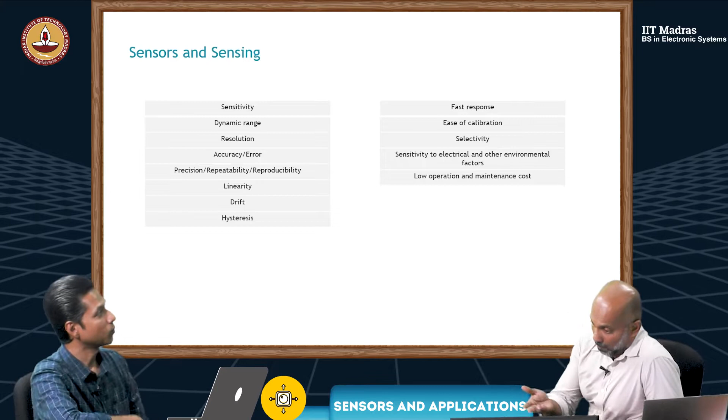Now, we also have this other kind of characteristics of sensors. Normally, if you were to choose a sensor, what's the first few things you would look at? You talked about the temperature sensor before. You said you chose a cheap sensor and then you had some problems, remember? That's true. So let's say I'm telling you, get a sensor. What will you look at?

Maybe I will look at the accuracy. Accuracy, yes, probably the most. I will maybe check whether it can sense the range of interest. Suppose it's temperature, maybe I want from room temperature to 1300 degrees Celsius. But if I buy something that can measure only 100 degrees Celsius, then you will send me out. No use. What else? I may want it to work for a long lifespan.

I always want good sensitivity, of course, since you gave some hint about sensitivity. Right. So here, if you look at these two different tables, you talked about sensitivity, range, resolution, and accuracy, right? Resolution, we did not discuss. Resolution also, we will see later.

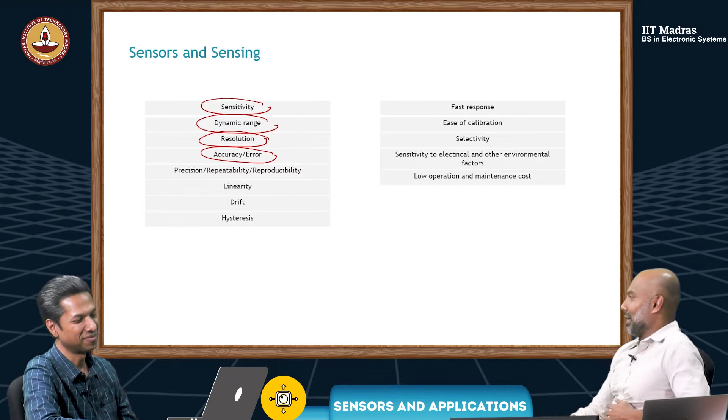But there are also other things like precision, repeatability, reproducibility, linearity, drift, hysteresis. I think when you hear these words, you probably can get some idea what it is. But it's good to know formally, with regards to sensor output, what these terms exactly mean.

Now, you also have things like fast response, ease of calibration, selectivity. Is it sensitive to some outside effect? Selectivity, I think, is very important. So what about fast response? It depends on the application. If you have some feedback, would fast response be preferred? How quickly your sensor reacts. If I want the system to settle within some time frame, I may need a sensor with much better response. So your frequency should be high. Correct.

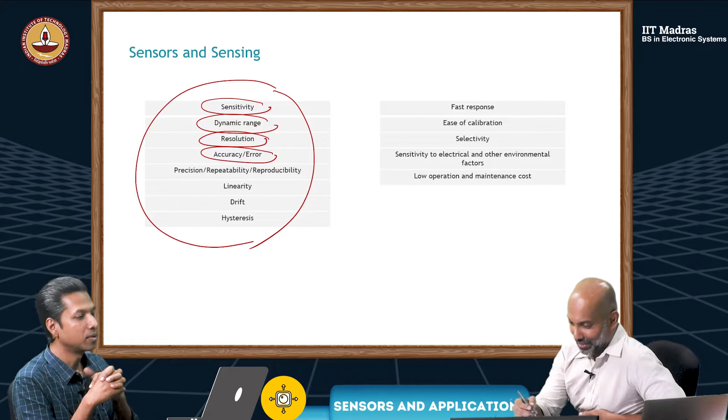Ease of calibration, we'll cover this separately. These ones are as important as the ones here. Initially, if you ask anyone, they'll probably say the same thing as you: accuracy, sensitivity, range. That's why I have it in two different tables, but both tables are very important.

So fast response is if you have some kind of feedback loop. If you want the sensor output at very high frequency because you want to change something, an actuator or something, then the sensor has to respond very fast to the measurement. Right. Ease of calibration.

I don't want to calibrate always. I already purchased it to do this job. But sensors over time might change due to many different factors: temperature, humidity, a lot of different things. So ease of calibration is important. Will it take minutes? Hours? Days? Months? Whether I have to dismantle everything and then do it. It depends on that.

Now imagine you're the manager on a workflow. You have 10 sensors. If you have to spend, let's say, 2 weeks to calibrate the sensors, you probably have to halt your workflow, right? Correct. So again, how easy is it to calibrate?

Now, selectivity. What does that mean, Bobby? Selectivity means I'm going to select something. I want that only.

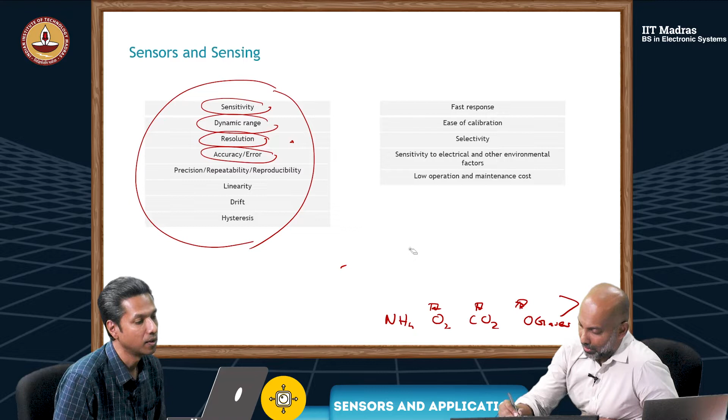What else do we have here - sensitivity to electrical and other environmental factors. What is this electromagnetic interference I heard about? I don't know, you're the electromagnetic guy, that's why I'm asking. And shielding and all these things - I don't know why, but I can give an example.

I was doing some measurement using an oscilloscope. I connected the probe and was just hand touching it - my finger touched the probe of the oscilloscope. I saw that I'm generating some waveform, because the display started showing a nice waveform just from touching it. So there's some interference there, from me touching it. Then I tried to measure its frequency - any guess? It was giving 50 hertz.

So that is what you meant by interference. Yes, because I am coupled to the wiring of 230 volt 50 hertz wiring and my body - there is some capacitance. I'm sitting on a wooden chair, not electrically grounded, so there is some current flowing through. This is a very, very small current, but I am at some potential, and the oscilloscope is very good, so it is able to show that waveform.

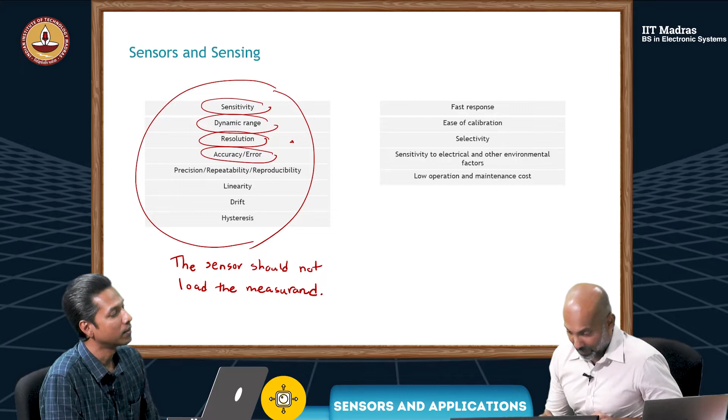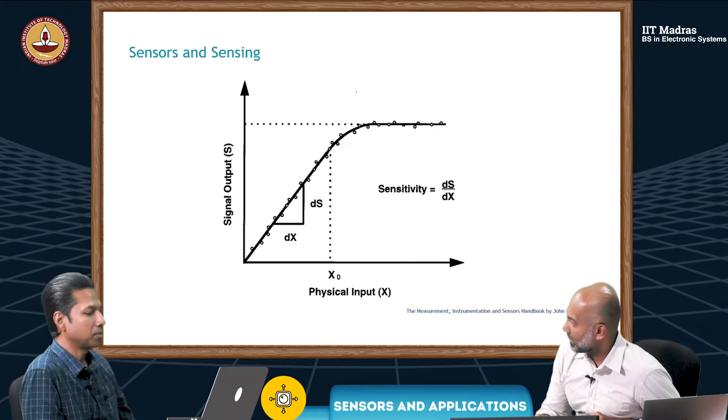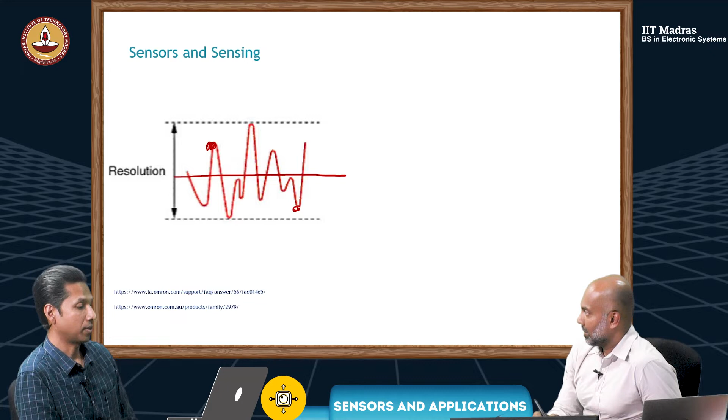Input is fixed. We are only trying to measure one thing. You have made the sensor electronics, and there is a final output coming. That is changing. There is change.

That's a problem, isn't it? Because then, let's say for example, you measure the next step up, right? Then you might have that next step within this range, which I may not know. We don't know, but it could, because in reality it could move up to a different level. Correct, but it's not.

That's the difference between one point and the other. Let's say you're measuring some length, doesn't matter what it is. Your first point is L1, next point is L2. You have a sensor, now you measure this length here. So the sensor is kept at L1, and then at the L2 location you are measuring.

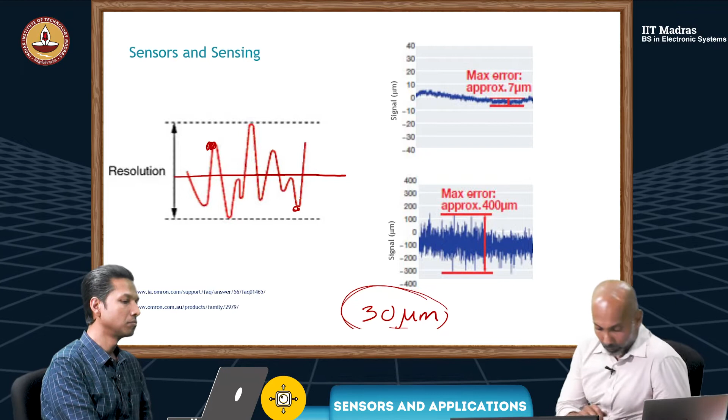Got it. What is this? Oh, many straight lines I can see. There are some dotted lines also. I know you like straight lines and sensitivity, you can easily measure, right? Yeah, correct.

But you mentioned something when I showed you the different characteristics of a sensor we should be considering. You said something about accuracy. I care about accuracy. It has to be close to the true value.

So if you look at this graph, you have a straight line here in the middle, not the dotted one. Let's say that is your ideal graph. If you're measuring something, all your points should fall on this ideal graph. This is the input versus output characteristic.

But in reality, let's say you have a sensor, and you notice that your output is not falling exactly along this line, but on either side of your ideal output. So some amount of variation is there. In this graph, the dotted lines show the range of this variation, where these values fall between. This variation can come from the sensing element or the electronics, or from some outside interference or environment. All these parameters contribute, and you don't have much control over them, so it may change randomly within that range, somehow out of your control. Because of that, it doesn't fall exactly on that ideal line we expect.

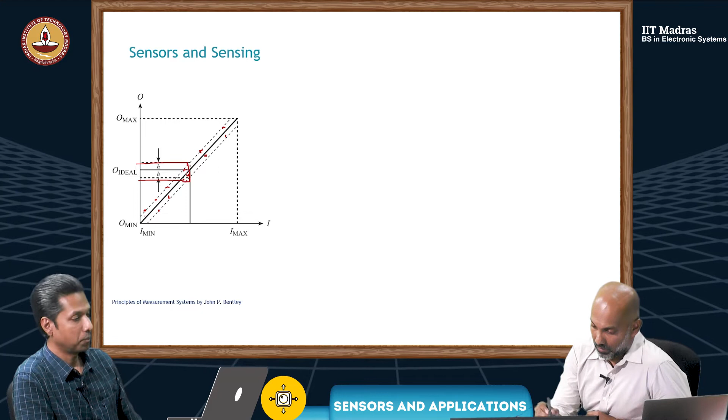So here also, suppose like the previous plot, if I am measuring at x naught, with respect to time I may not get a constant output, it may vary up and down. But generally, if you do enough tests to characterize this sensing element, you might see that it falls between a certain range, which is what's indicated by those dotted lines. So the ideal output and the points might fall between two lines or range, and in this case you have minus h and plus h. This is how much it changes.

Now, if you talk about the randomness of this, if you draw a probability distribution graph, you have minus h and h, so the width of this is 2h, correct. So the ideal graph is here, but it could vary plus or minus h.

And then if you talk about the probability, this will be 1 over 2h, because everything should fall between these two dotted lines. So 1 over 2h, 2h is 1, which is probability of 1. So there's a 100% chance it will fall between these two lines.

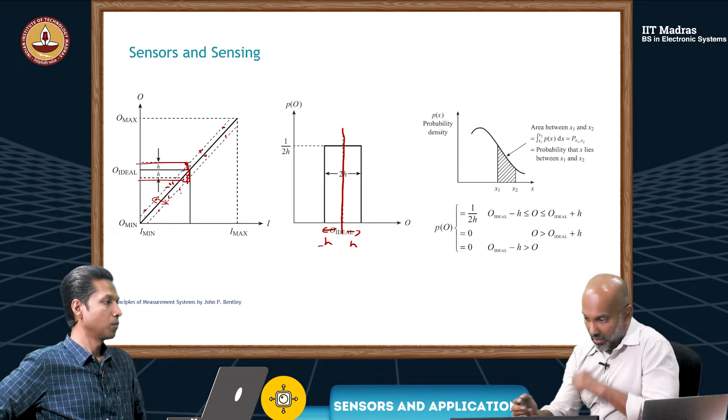This is another way of showing it. You have your ideal O, ideal minus h or ideal plus h, and you have 1 over 2h. What I'm trying to say here is if you have a point, you want to look at the probability of that point falling between two lines. If you have point x, it will fall between x1 and x2. In this case, it will fall between minus h and h.

So that's accuracy. So to my understanding, the sensor is mostly ideal on all other aspects. Yes, let's assume that's ideal on all other aspects. And then you are looking at the output, but there is some randomness in the output. Which is why we're talking about probability. Right, yes, there is some.

So this is kind of the random error. This is probably contributing to the resolution that you mentioned also. Yes, because there also it was random output that is coming within a range. Correct, so these are connected in some fashion. Or this randomness limits your resolution.

Yes. For example, what I'm trying to say is you might do an experiment in one room, and you might see some random noise, let's say. You take it to another room, it might disappear or it might be higher. Ideally, it should not. But then maybe there's something like temperature or moisture, some random variation in the room that contributes to what we see here.

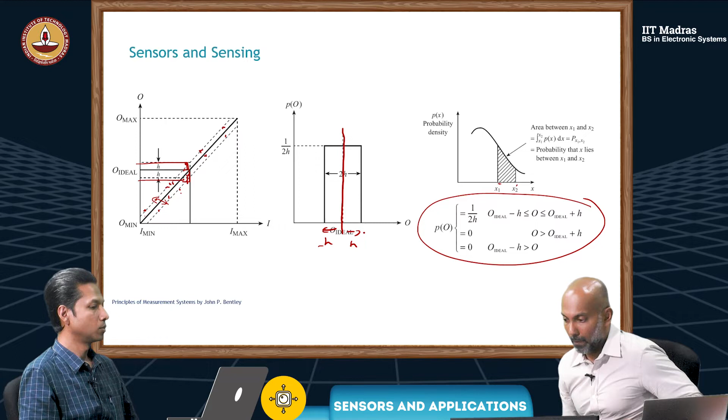Do you play darts? I've done that some time back here. Are you good at it? Can manage. I mean, this looks like a dartboard, right?

Yeah, so Bobby, I think one of the things that people confuse a lot is the difference between accuracy and precision. Because people say, it's a very precise instrument. What does that mean? How is that related to accuracy? So we talked about accuracy before, right? Do you think, looking at this picture, whoever was throwing darts, this could be a sensor output and you put in different contours, for example. Correct. But if someone's doing that, do you think it was very accurate?

Somewhat, not very accurate, but somewhat. I should also say you're aiming to be here. If you're aiming to be here, maybe somewhat, but nearby, I would say. Not that accurate, right? So the true value is at the center. It's away from the true value, right, and you can see there have been several attempts, and unsuccessful attempts. So they're kind of all over the place. So the error is from that center point to each point.

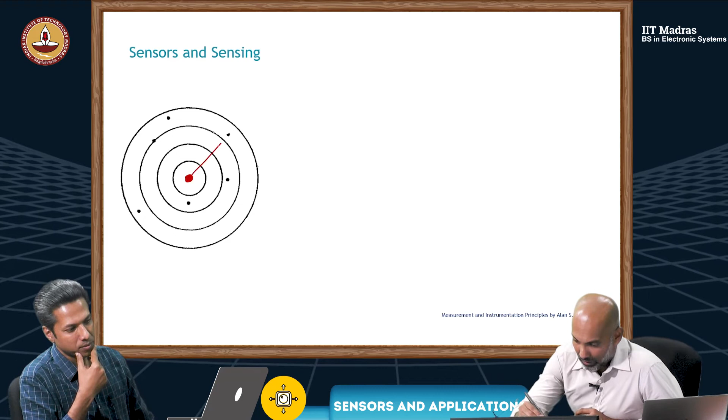What is it here there? Is it accurate now? It's also similar. Its center is somewhere, but this guy is able to hit it repeatedly at some point. Clear, so now he's somewhat improving. Now he's hitting at the same point. But not much use. Not use, right? Because we want it to be there.

So what if I tell you he's not accurate, but he's precise? I would say he is repeat... I mean, his repeatability is high. A person has high repeatability. So when you talk about precision, or we talk about repeatability, or we talk about the distribution of, let's say, some sensor values, for example.

If you take 10 sensor values for the same input, and if they're all over the place like this, we can safely say it's not repeatable, or it's not very precise. Yeah. Right? It's not precise. It's not accurate also, in this case, yes. The first figure.

Second figure, right? Somehow now the values are the same, but it's still not accurate. Correct. So it's not accurate, but precise. This is precise. That's the second figure. Second figure is precise because the distribution is much smaller compared to the first figure.

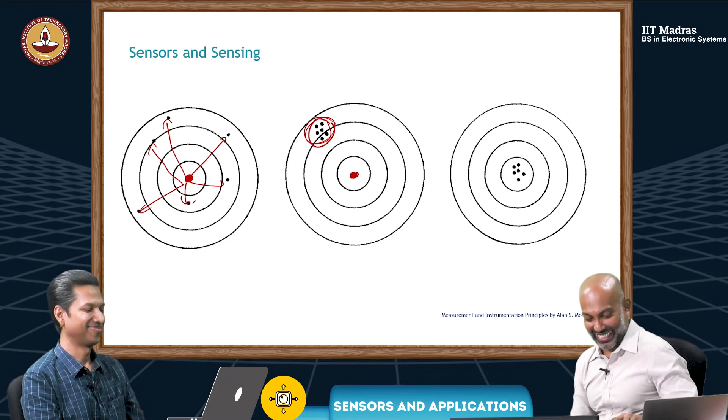Okay, Bobby. Let me test you now. You know what resolution is? Yeah. You know what accuracy is? Okay. Now let's start with this graph here. Here you have your perfect ideal sensor. And to the left here, you can see in red, and also a staircase. What is that red one? The red one is just a line joining this staircase. But let's say your sensor output is the staircase.

In terms of accuracy and resolution, how can you explain this first graph? I need to compare it to the continuous line. You compare to the straight line. Yeah, compared to the straight line, of course, the resolution is reduced. Because as I'm changing the input, for some time there is no output, then there is a change in the output. So some smaller changes it's unable to detect, or I am unable to resolve smaller quantities.

Right. So I have a staircase output, but I also see some deviation; the slope itself is changed. So what can you say? So there is an error in the gain, or error in the slope. Yes. So you could also say it's not very accurate, right? Low accuracy. Or that error in the slope will affect the accuracy. Okay. What about this one?

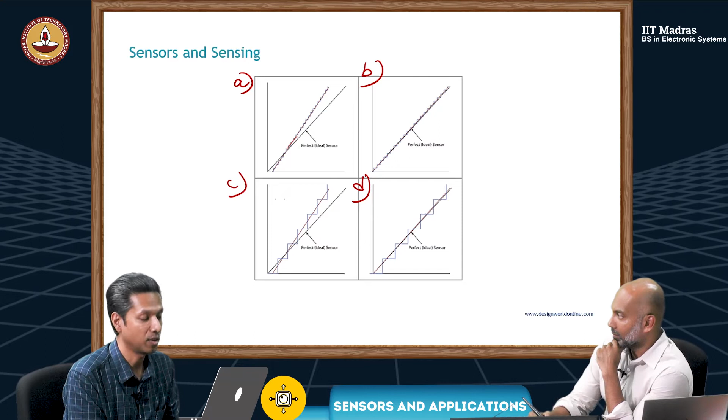Let's make this A and B. Between A and B, maybe I will prefer B because at least there is no gain error, the slope is the same. Okay, so here, if you compare these two, this one has better accuracy, but limited resolution.

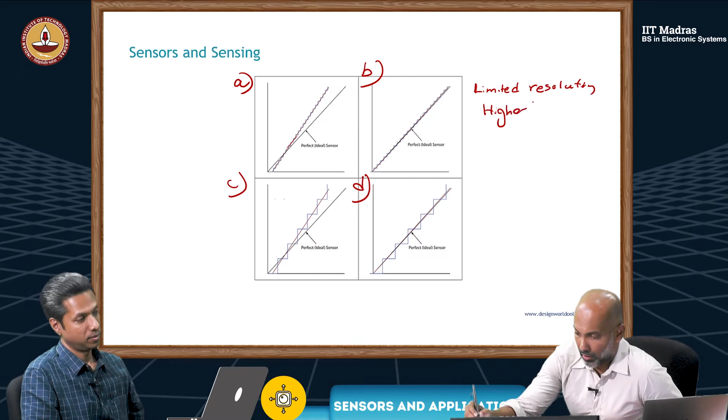But higher accuracy compared to A. And also high accuracy. I mean, if you compare to the perfect ideal sensor, it's close to that. Yeah, high accuracy.

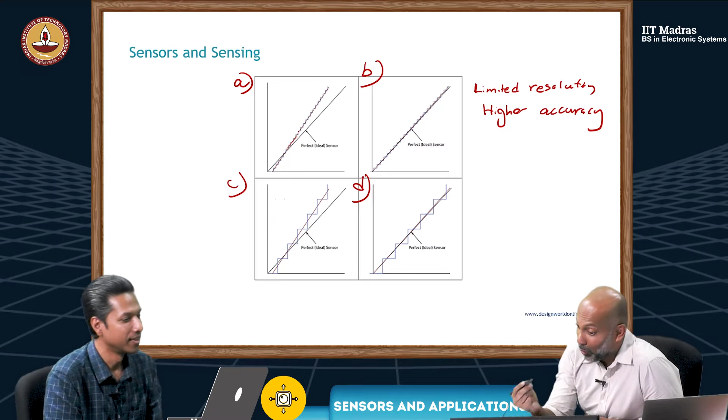Now, look at C. This is a nice staircase, right? I need to climb. It's so big. Resolution is so bad. So here, if you compare this one to this one, we can clearly see this resolution is much worse. Correct, right? But it doesn't stop there.

It has additionally the gain error also. So bad resolution and bad error. Right? It's not accurate. What about this one? D is poor resolution. Still poor resolution, right? Because of these large steps. Correct. But at least it's accurate. Yeah, it can also resolve smaller quantities.

So if you were given a choice, you would... I'll go with D. You go with D. Right? Okay. I passed? You passed. I thought you even got angry when I showed you C.

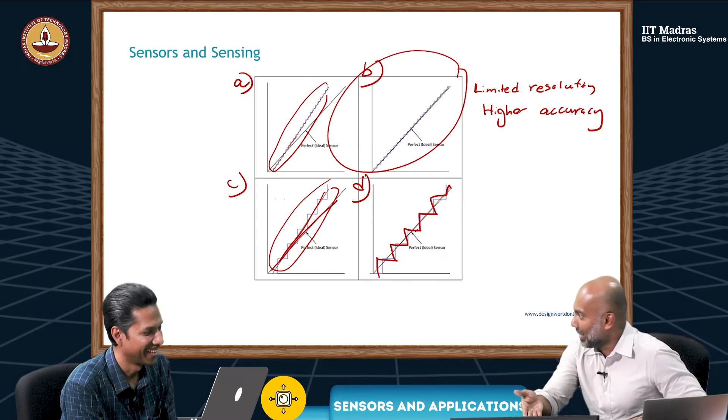Bobby, now I know you like straight lines. Yeah, of course. And we've been talking about straight lines all this time. And I saw when the sensor saturated, you said, forget about that part. Then we cut it and we had a range. And you found the sensitivity. You were happy. But now here's a problem. Here you have an ideal case. Ideal sensor is a straight line, which is what you like.

But you go to the lab and you're now testing a signal output. It's something like this. I don't know how to explain. Is it slipping in between or what? It's not straight. If you had this ideal, you'll have something like this, KI plus A, a straight line. K is your gradient, A is your intercept, right? You have a nice output, but in reality, you are getting something like this.

Which means what? There is some nonlinearity. It deviated from the straight line. And there's a point where there is also a maximum deviation. So sometimes sensors do this. They deviate from that line. And here you can calculate the maximum deviation, and then that is related to the maximum nonlinearity as percentage of the full scale.

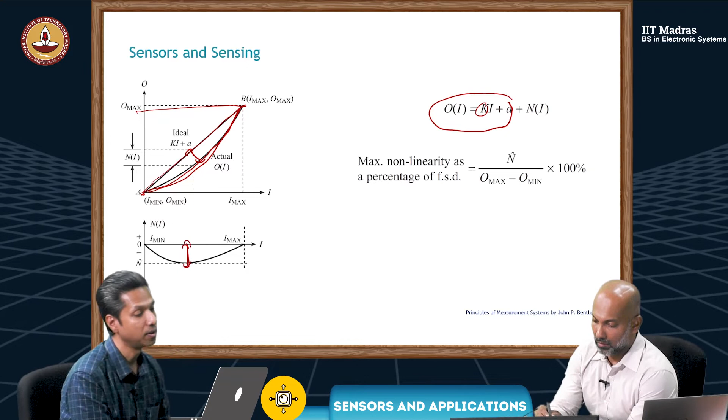So this O max and O min: this is the maximum here, and this is the min. So the difference of maximum output to minimum output. This is the range you're trying to measure. And N cap? N cap is this one, the maximum deviation. Ideally, it should be 0. But because of this, you'll have to add that term now.

So this introduces some, what shall we say? As input changes linearly, output is supposed to change linearly. Now the output has some harmonic content probably, because it's a non-linear characteristic. So does this depend on the sensor or the back end of the measurement system, or on outside interferences? What could cause something like this? I would say not much outside interference. Probably mostly to do with the sensor itself and its electronics.

So if you buy a sensor that shows a linear output, later on can it become non-linear? I think we cannot generalize. Because the manufacturer usually tests it for its lifetime. And if the company says non-linearity is 1% for 10 years, I think they have passed that test. So we can sort of guarantee that. Because they do some accelerated aging and then test.

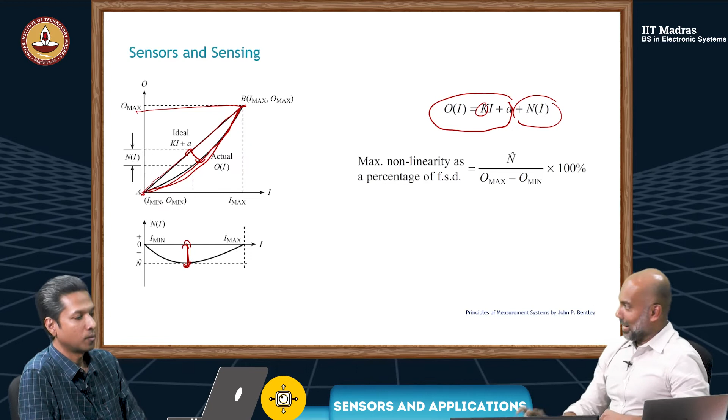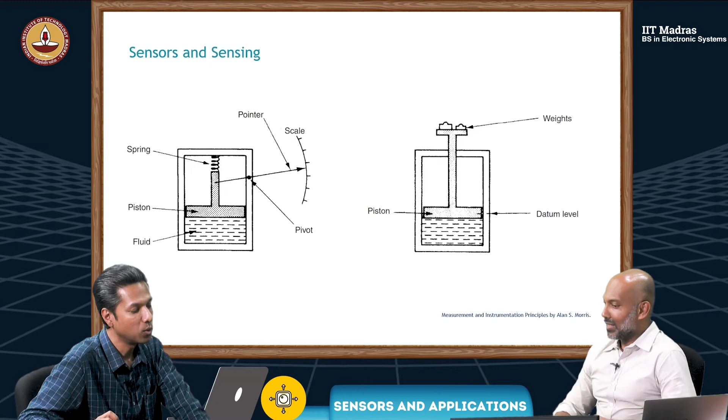Oh, so now you have made that plunger go out, and then you have kept a weight. You saw the weights, huh? I saw the weights. Now I have some weights there. Also, there is something called datum level. What is that? Yeah, your scale. I know that you also did not like this scale and the pivot, so I removed everything that you did not like. Okay. So when someone says your sensor is not good, you have to improve it somehow. Correct. So now I have a datum level here, and I put some weights here.

Oh. So that means if pressure increased, what am I supposed to do? If the pressure increases, it will go up. We have to somehow simulate what the spring does. Then you have to put something on top of it. Oh, so I keep changing the weight until it comes back to this datum level. Okay. And by doing that, you can get rid of the spring and hopefully get rid of the non-linearity.

A smart idea. But then someone has to keep putting the weights. Yeah. It could be done using some automation. Yeah, that's true. You can somehow have some feedback loop and just drop the weight, or somehow generate magnetic force and push that down. Many things can be done. That's actually a smart idea.

But in that process, you have removed the spring, and the scale also, right? Yeah. You don't need a scale anymore. Because the more things you add to a system, the more errors you're introducing as well. Now this pointer that you see here, if there's some dirt or something, it might not move perfectly. But in this case, we've got rid of that. So I'm able to relate it to something else. I'm thinking what it is.

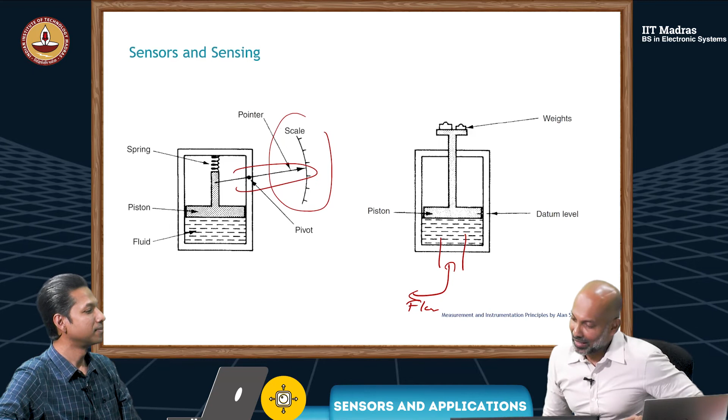So if there is a possibility, it is good to measure in this balancing method. Yes. You make a balance between input and output, make them equal. You are only meeting that requirement. In that process, you have removed other sources of errors. Maybe we will see something like this later on. Correct. Okay.

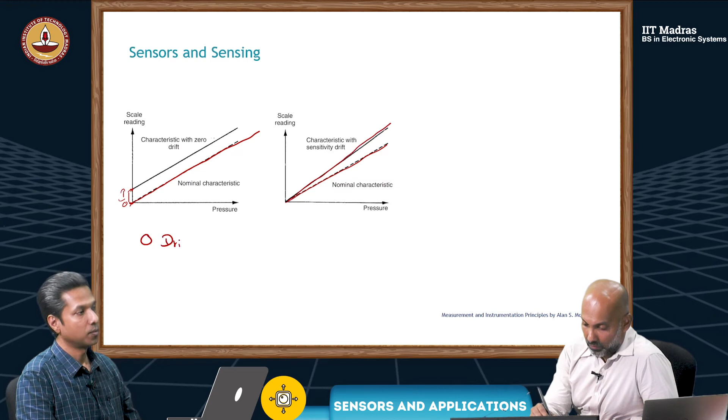And here we have a sensitivity drift, or a change in sensitivity. A change in sensitivity, yes, or changes, because it's not keep drifting. It doesn't go like this. So let's say sensitivity change.

So these actually, this looks like a very systematic error, not the random error you mentioned. Because random error cannot be this nice, right? It will keep varying.

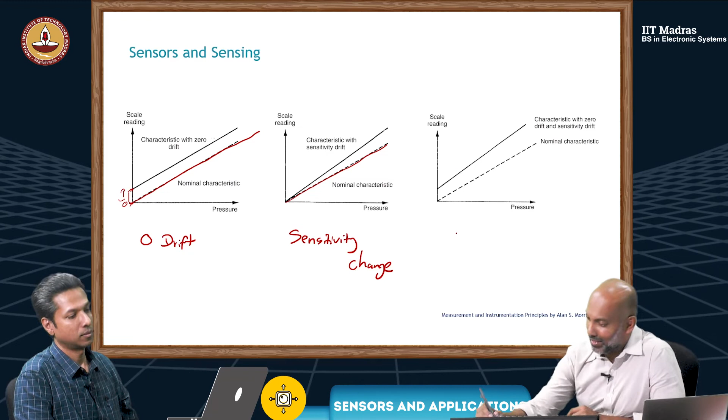What about here? Or it's a combination of both. You have 0 drift, right? Plus change in sensitivity. Okay.

So either 0 drift or offset error, that's also acceptable. Yes, offset error, yes. So sometimes for the sensitivity change, people also say gain error. Gain error for the change in sensitivity.

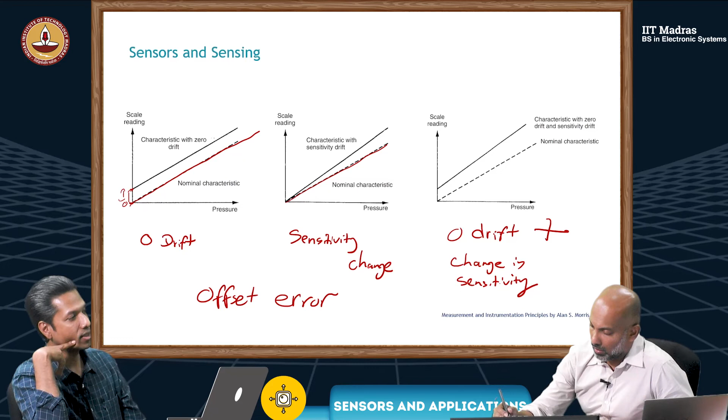For the second figure, for example, if I consider it as a slope, agreed, but it's easy to convey it also as a gain. We are expecting a gain of so and so, but it has changed. So it's a gain error and offset error, or 0 drift and sensitivity change.

Because I can make a measurement at no input, I'll get the offset, I can subtract that. Yes, offset error is gone. Gain, I may have to measure at 2 points and see what's the slope. The slope is different, we can do a correction for that. Exactly, but this cannot be done for the random error.

No, like what we showed before with resolution, for example. Right? It's moving up and down. Because if you test it 10 times, you could get 10 different answers.

Right? So normally with offset, generally it's the same, right? You would probably see the offset is the same if you test it multiple times. So this is example of a 0 drift, offset error, as you said, or a sensitivity change of the sensor, also called gain error.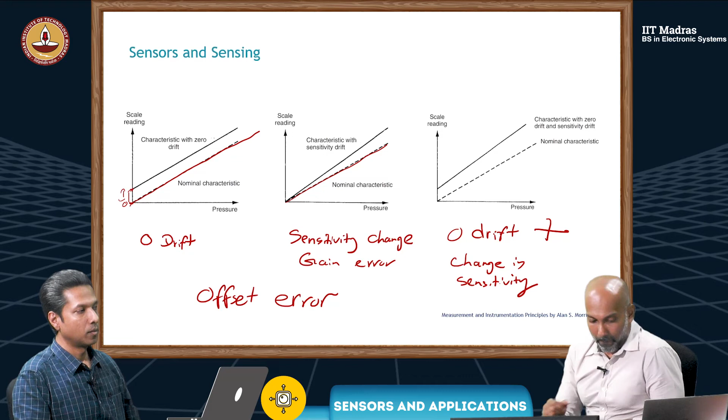So, Bobby, let's get back to this. We talked about resolution before. What do you see here? Let's say, I mean, this is just to show several of the concepts we talked about in one picture, so the students actually understand, right?

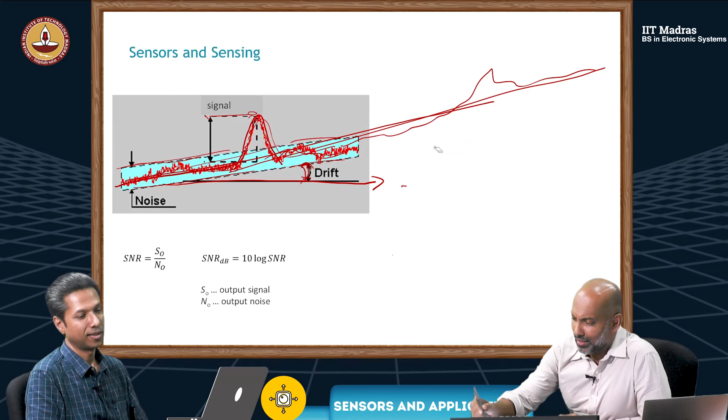Generally, yes. Okay, now, we talked about noise a lot, and you said random noise, and I gave some examples. You gave some examples: temperature, moisture, and all these things. But it's more serious than you think. Noise is a problem when it comes to sensor output.

In fact, you can see here there are different types of sensor noises. You have your intrinsic noise. Now, this could come from the sensor itself. If the sensor has movable elements, mechanical elements, that could introduce some error. It could be electronic also, in the sense, if it's a resistive element, of course that element itself will generate some noise.

Interface electronics, stray capacitors, things like that. Just Johnson noise. Yeah, so all this comes from different types of noises. In general, noise can come from the sensing element, and also from the electronics that you have. So that means it could come from the whole measurement system.

Yes, and yesterday you were mentioning an ADC, analog to digital converter. That guy will also introduce some noise, so we should not use that. But if you want to digitize, probably there is - we have to use it. Correct. So these are called intrinsic noises, that's to do with the measurement system.